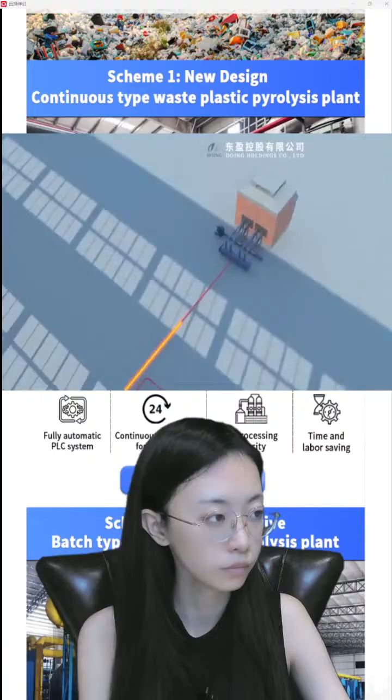We're the manufacturer of tire and plastic pyrolysis equipment.

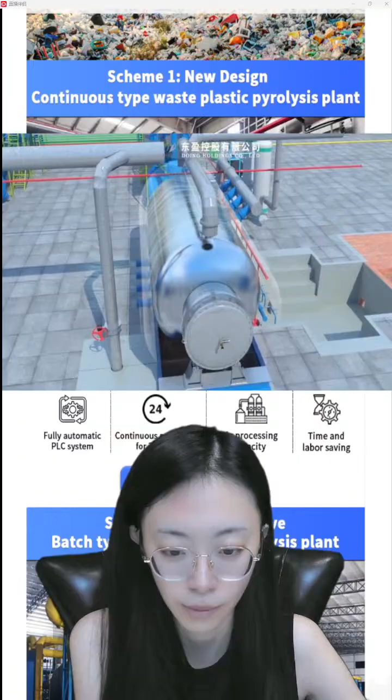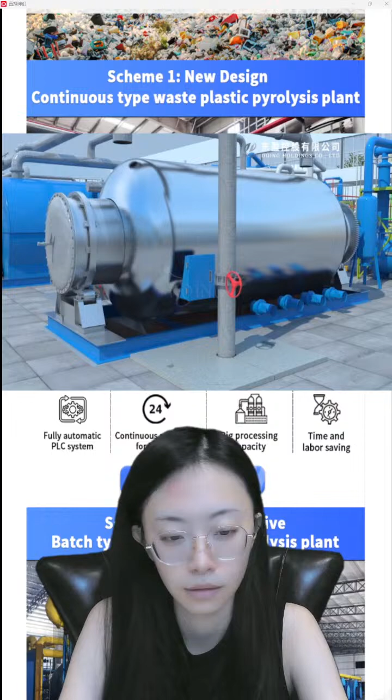We have the batch tire pyrolysis plant, semi-continuous and fully continuous pyrolysis plant.

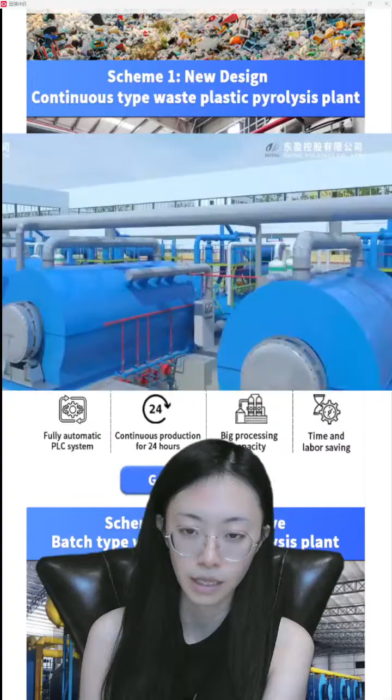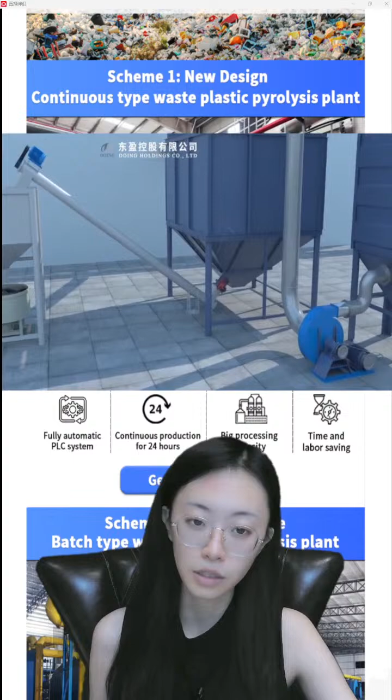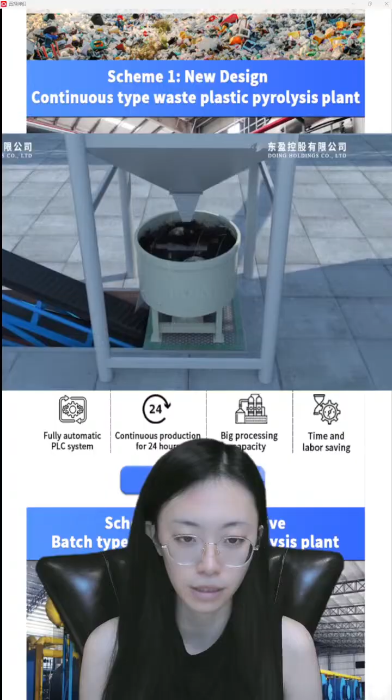Today our topic is: is it possible to recycle cable sheath by using the pyrolysis plant? Well, the answer is yes, and actually this processing way is almost the same as with tire and plastic.

We use the feeding system to feed them into the pyrolysis reactor, and as the temperature rises, the materials break down into hydrocarbon vapors, and then these vapors pass through the condensation system and are cooled into liquid fuel oil. There will also be some solid residue, that is the carbon black, which can be further processed or sold directly.

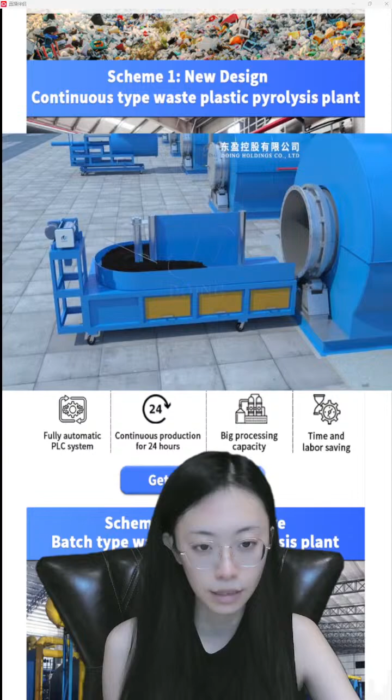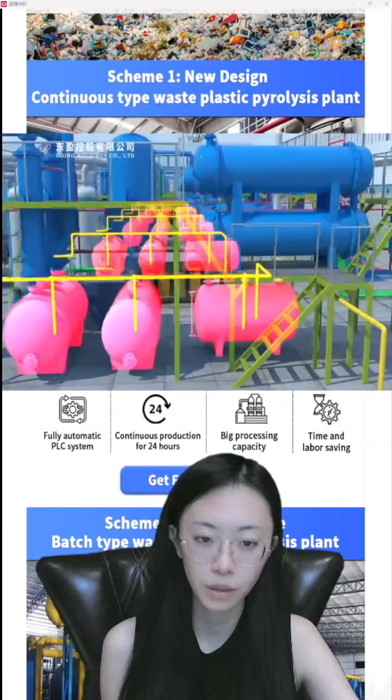And the uncondensable gas, this kind of tail gas, we will recycle by using the purification system, making the system more energy efficient.

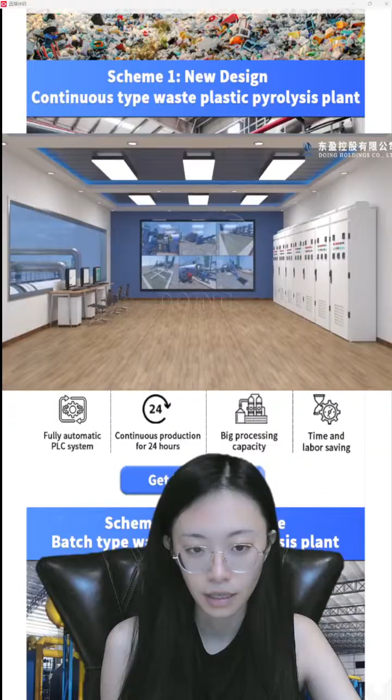But you need to pay attention, some cable sheath is made of PVC. PVC is not suitable for pyrolysis because it contains a high percentage of chlorine, and when it's heated, it produces harmful gas which is highly corrosive and harmful for the human body. So it not only damages the pyrolysis equipment furnace, but also creates a serious environmental and safety risk.

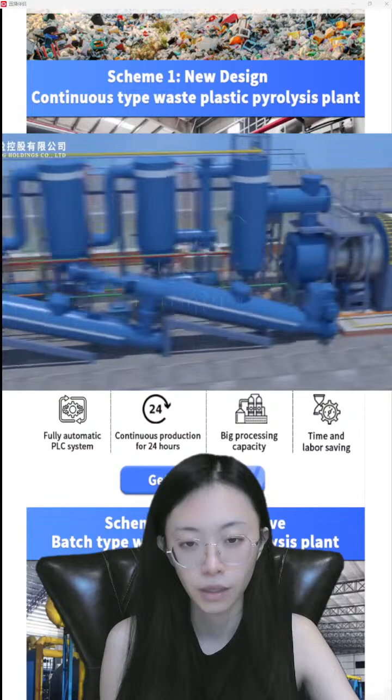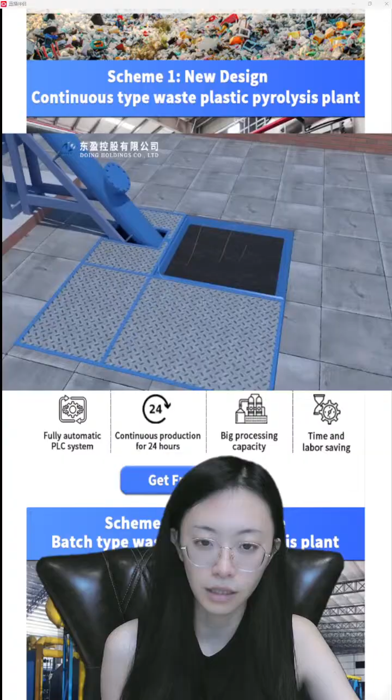So it's not suitable to recycle PVC, and PET is also not suitable as raw material for the pyrolysis plant. PET is commonly found in bottles. It's also not suitable for pyrolysis.

Its structure doesn't break down into useful oil fractions under standard pyrolysis conditions, so we can't get the oil. Instead it tends to form solid residues and produce low value gas, so it may cause a very serious problem: blockage, paraffin inside the condensation system, and pressure problems. That is why PVC and PET are rarely used in the pyrolysis system.

So if your raw material is cable sheath made of PVC, I would suggest you use other ways to recycle. But if it's PE, PP or PS, then we can recycle them. Compared with traditional landfill or burning, pyrolysis is cleaner, recovers valuable resources and reduces environmental harm.

Our equipment can not only process this kind of cable sheath, this kind of plastic, but also PP, PE, PS, ABS, PC and so on. And we can also process rubber. For example, one of the important rubbers is the waste tire.

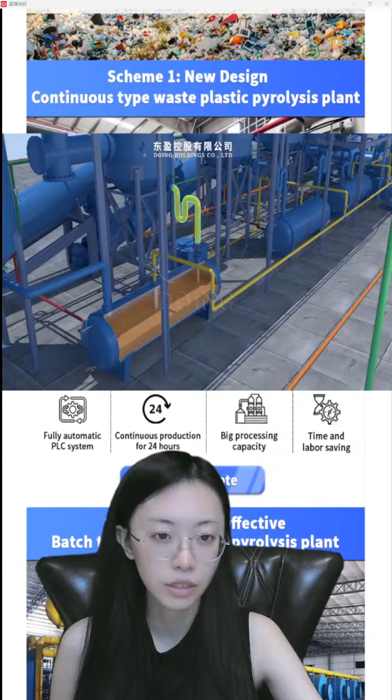Okay, and this is the fully continuous pyrolysis plant. Let's start from the very beginning. We will introduce the different parts one by one and talk about each step.

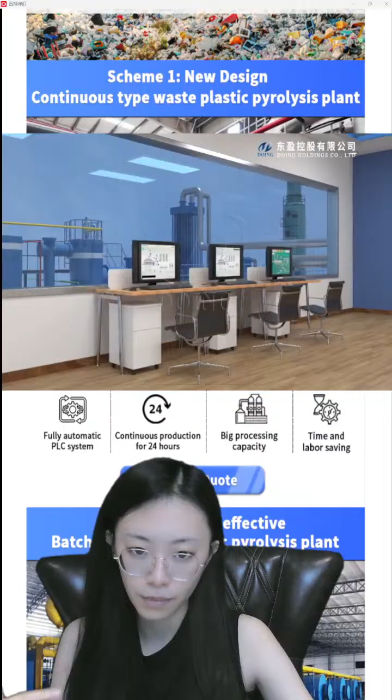This fully continuous plant can work continuously for 45 to 60 days, and this is the PLC system that automatically runs the whole processing line, including the feeding system, the pyrolysis system, condensation system, slagging, and purification system. This is the purification step; all the equipment is environmentally friendly with no pollution, so you don't need to worry about this.

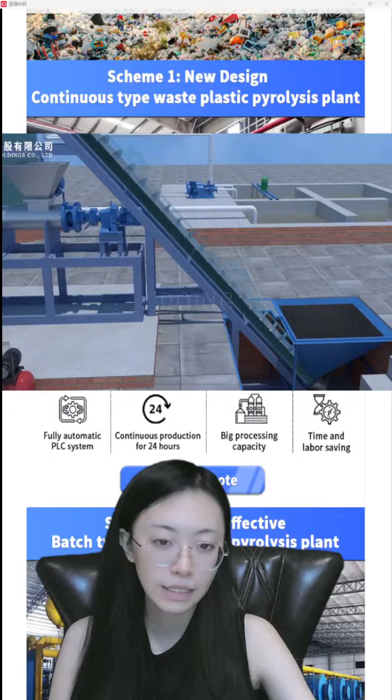And then this is the feeding system. We need to process the raw material. For example, if your raw material is tire, we need to crush it to rubber powder. And if your raw material is cable sheath or other plastic, we need to use the plastic crushing device to crush it into plastic particles.

We use rubber powder with a diameter of less than 1 to 2 millimeters, conveyed to the horizontal feeding auger by the lifting screw conveyor, and then it is conveyed to our reactor for heating.

The furnace of the reactor adopts an indirect heating design with flame heating air, and the air will hit the equipment, which can not only protect the inner body of the reactor and prolong the service life of the equipment, but also make the heat more even by using the indirect way. For the batch type and semi-continuous, we use the direct way.

We change the traditional burner to the tail gas burner, which has advantages of more uniform heating and is more efficient and more convenient. And this is the middle supporting wheel for our reactor parts. There is a cooling circulating water device to cool the lubricating oil and thus protect the supporting wheel.

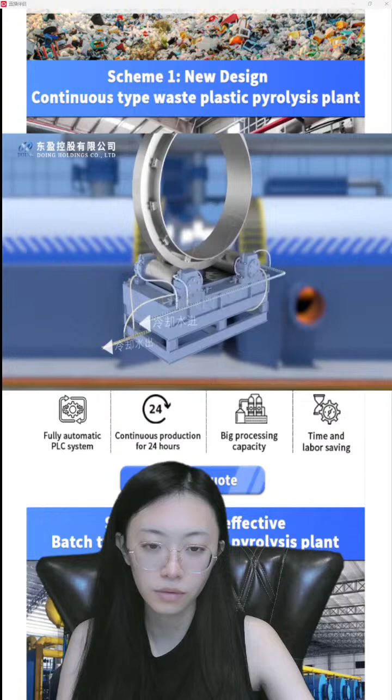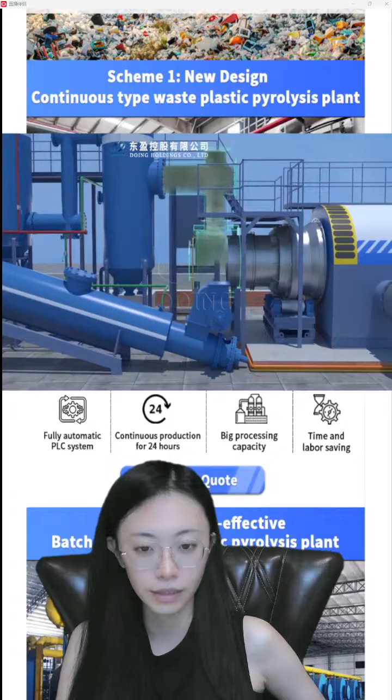And then we can get the gas and the carbon black from the outlet of the reactor. The green part is the fixed section, which is connected with the buffer tank upwards and the slagging system downwards. And this is a buffer tank, which is used to slow down the gas and to precipitate impurities. And next we come to the buffer condensation tank.

We have 3 tanks to further precipitate impurities and have the water cover outside. Outside is the way to have the condensation effect. And after condensation, the oil will roll in the U-tube and go into the storage tank. The U-tube is used to balance the pressure and prevent the oil gas from going back to the previous step.

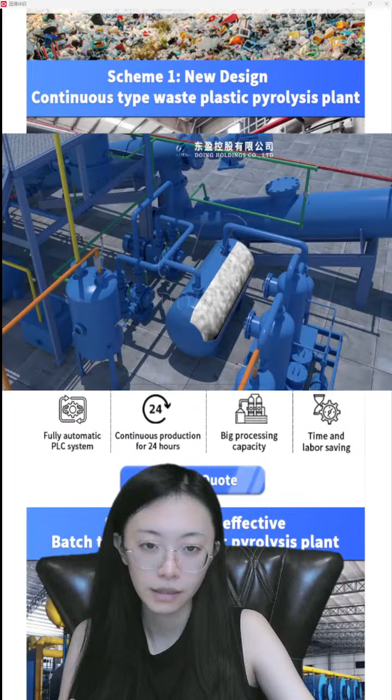And these are the 3 vertical condensers used to increase the cooling area and ensure all the gas is condensed to oil. And this is the negative pressure device, to pump the gas, and it can reduce the time that the carbon black contacts with the gas, to have a good quality of the carbon black.

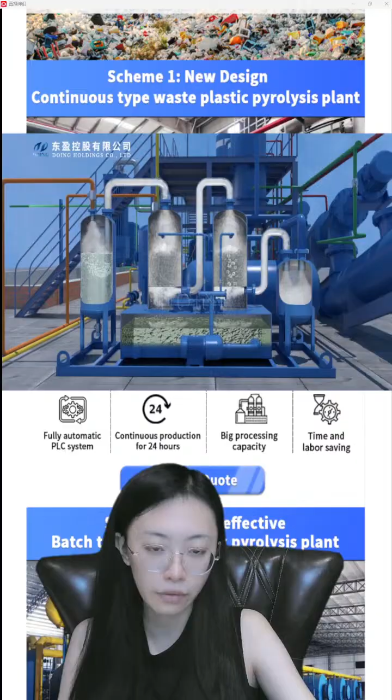And this is the gas that cannot be condensed. We call it tail gas. We use this odor removal system to purify the hydrogen sulfide inside, and then the tail gas can come back to the reactor for heating. For the fully continuous pyrolysis plant, we only need the first 8 hours to use extra heating energy, like natural gas, coal, tar, or fuel oil. And in the next few days, we can all use the tail gas. There is no extra heating energy and extra heating consumption.

And then this is the slagging system. In the first section, it has the heat preservation system, and we specially designed a material seal design to prevent the gas release. And by using 3 stages of the condensation slagging system with a water cooling, it can be packed directly.

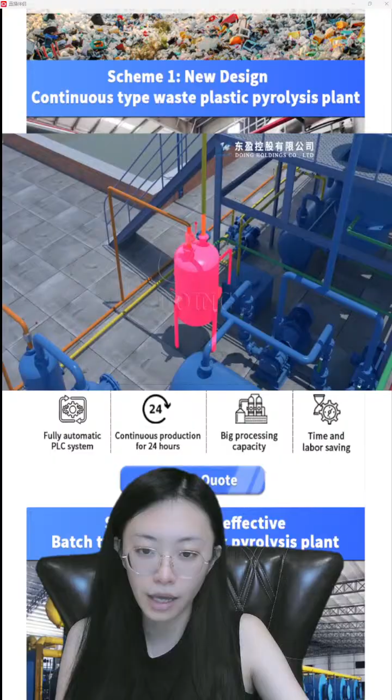Here are some safety devices. The buffer tank is connected with a pressure relief valve. If the pressure is too high, the valve automatically opens to release excess oil gas, and then the gas will release into the standby water seal and cool down into oil. Here is the standby stove.

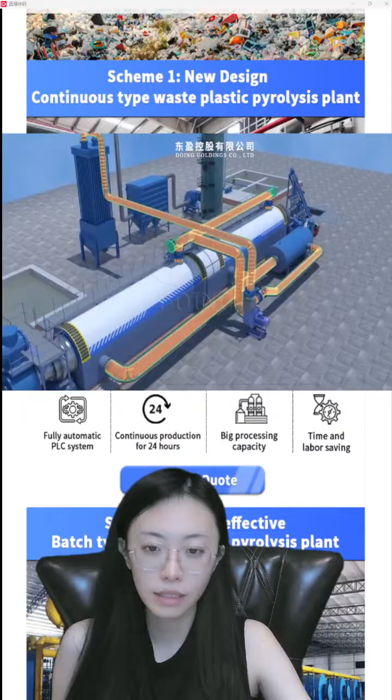And then this is the purification system. There are 3 devices for the flue gas treatment system. The first one is the air cooling step, to cool down the temperature of the gas. And then the second is the dust collector, which is used to remove the dust from the flue gas, and the desulfurization tower.

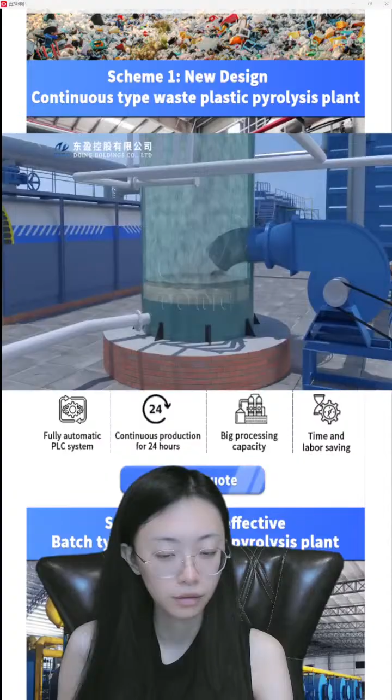Too loud voice. Sorry, wait a minute, I'll check it.

And then this is to purify the gas by using the purification system, and then there is no pollution during the production. And then this is the automatic pumping system to collect the oil into this final tank.

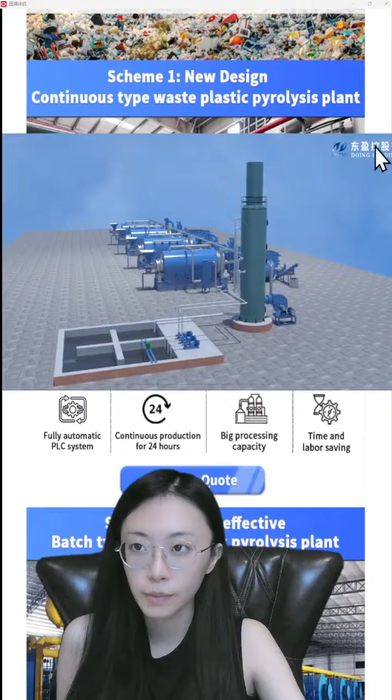Okay, this is the fully continuous pyrolysis plant, and let's talk about this. This is the... hello. And this is the fully continuous one.

The capacity of the fully continuous is 15 tons per day, 20 tons, 30 tons, and 50 tons per day. Most of our customers choose the 50 tons per day, because the customers who choose the fully continuous one have a large capacity, need to process plenty of raw material every day, and have a high standard of working efficiency. So that is why most customers choose the high capacity continuous one. And the first advantage of the pyrolysis plant is that it's fully automatic.

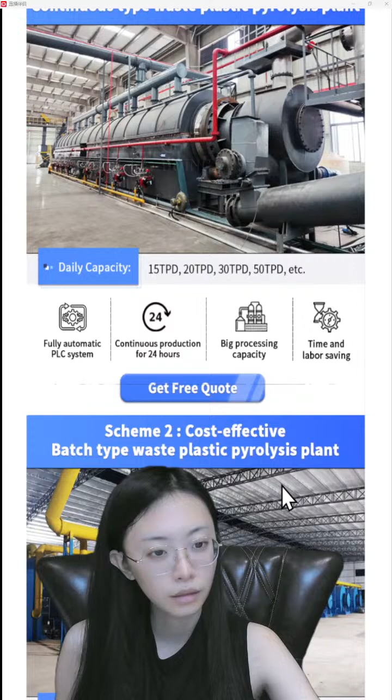Fully automatic, and we can process with the PLC system. And then the second one is the continuous production for 24 hours. We can use them and work for 45 to 60 days. That don't need to stop the production.

Like the batch type one, we need to stop them and cool down the reactor for slagging the carbon black, but it's not very necessary for this fully continuous one. They can feed the raw material, have the pyrolysis reaction and slag the carbon black at the very same time. So this is why it's called fully continuous.

And the time and labor saving: for a 50 ton processing step, we only need about 1 or 2 workers. What's the price of the semi-continuous one in USD of 15 ton per day?

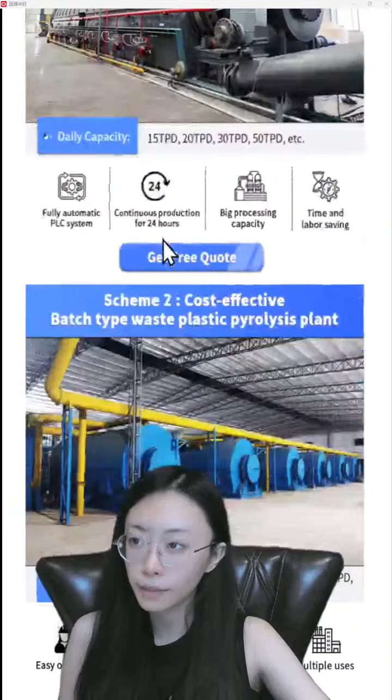Okay, and if you're interested in the semi-continuous pyrolysis plant, let's see about it. This is not shown in this picture. Let's see the 3D video. The semi-continuous one also doesn't need to cool down the reactor to slag the carbon black. It can slag the carbon black at a very high temperature, so it can save like 5 to 10 hours, and it can feed the raw material at the same time to have the pyrolysis reaction. Also, it has a higher working efficiency.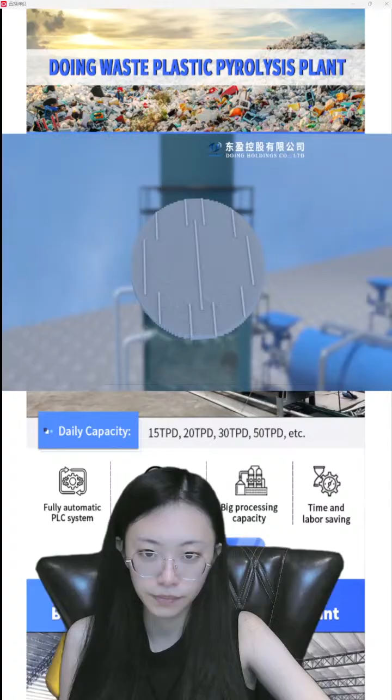And about the purification system, we have the water film dust system and the desulfurization tower. There are different ways to purify, so the process is kind of different. And this is the desulfurization tower that has 3 layers of spraying and 3 layers of precipitation. And this is a demist system to lower the moisture of the gas.

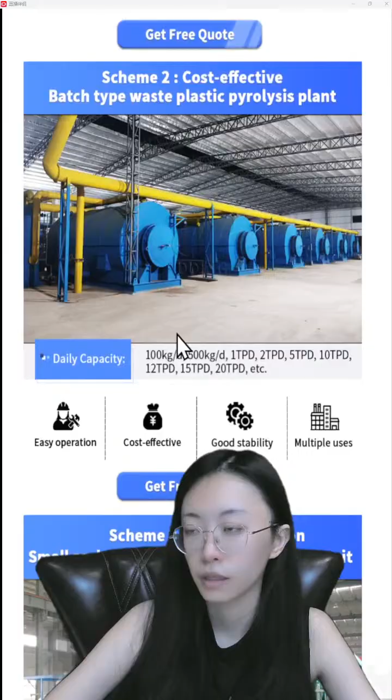Okay, this is the batch type pyrolysis plant. Let's see about this picture first. Here it is a batch type pyrolysis plant. That's the daily capacity - we have small ones that are 100 kilogram, 500 kilogram or 1 ton, 2 ton.

This type is for tire processing, because if you have a large need for oil business, it's more suitable for this several processing line, and it's easy operation, and it's the cheapest of the 3 types, because the technique is the most common one, and it's more easy to control - doesn't need a PLC system, it's not very automatic. Just compare with fully continuous or semi-continuous: cost effective, good stability, multiple use.

So the biggest advantage of the batch type one is the multiple use. We don't need to process the waste tire into black powder, rubber powder, and for the plastic, we also don't need to process them. We can put it directly into the reactor.

For many other raw materials like oil sludge, coal tar oil sludge, aluminium, plastic, cable sheets - some of them may have big blocks, so they're not very suitable for the continuous type, because they need to be slagged by the slagging wrench. If you have large ingots, like aluminium ingots, they will block the screw conveyor. So all the raw materials that can be processed using the pyrolysis technique can choose the batch type one. That's why it's multiple use and also very popular in this market.

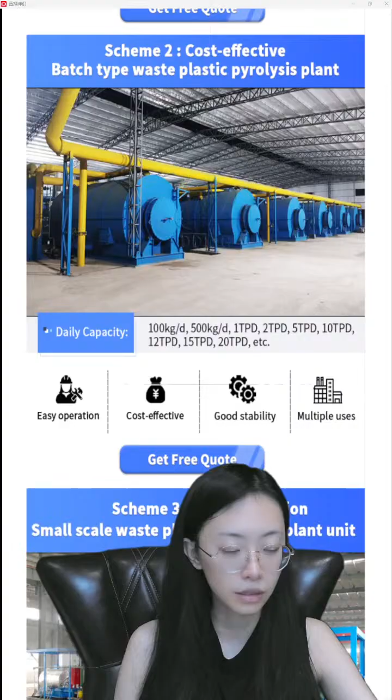And let's see about the 3D video of the batch type pyrolysis plant.

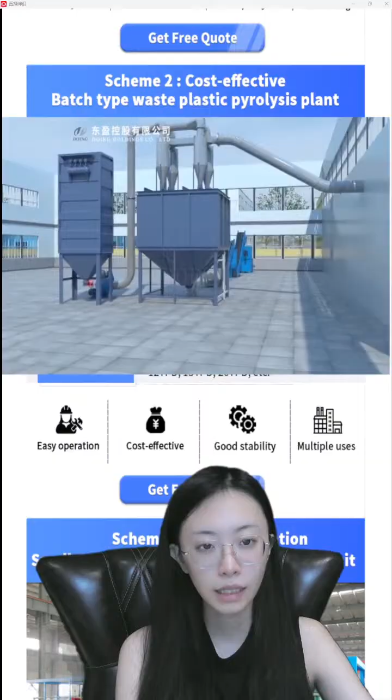Here is the processing line of the batch type pyrolysis plant. It has 6 lines. One processing line just occupies nearly 300 square meters. With 6 lines, the daily processing capacity is nearly 70 tons.

First is the feeding system. We need 2 workers for this. Here is the automatic feeder, with a hydraulic thrust of 50 tons. It will take nearly 2 hours to feed the raw material, the whole tire, into the reactor. After feeding, we will close the feeding door and open the combustion system to heat.

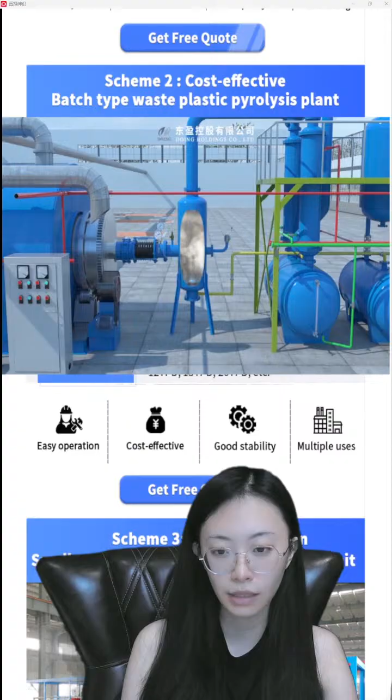After heating for nearly 2 hours, the temperature will gradually rise and gas will be generated. The gas is a mixed oil gas and tail gas. The gas will come out at the outlet, and then first come into the buffer tank, which can slow down the gas, make it stay in the cooling system longer, and ensure sufficient cooling in this step. It can also deposit the impurities.

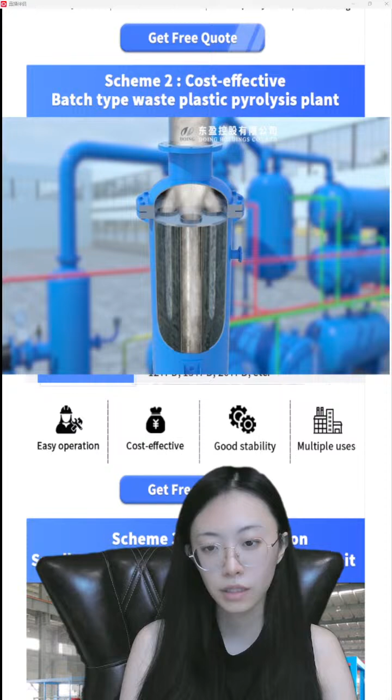Then they will come to the cooling system. This is the tube condensers, different from water tank condensers. The first is the vertical condenser, because the first-cooling oil is relatively higher and sticky. By using the vertical design, the oil continuously flows to scour the inner wall to prevent blockage. Then they condense into this 2-ton oil storage tank.

And then they come to the second step, we call it the oil-water separator. It is a condensation system, a safety device and a purification device. It can prevent the oil gas from flowing back to the previous device, and then purify the gas.

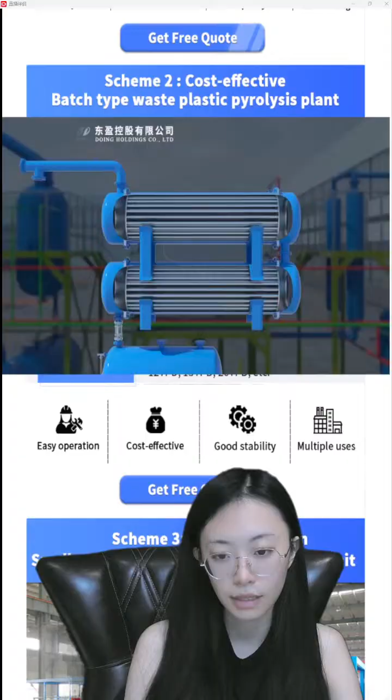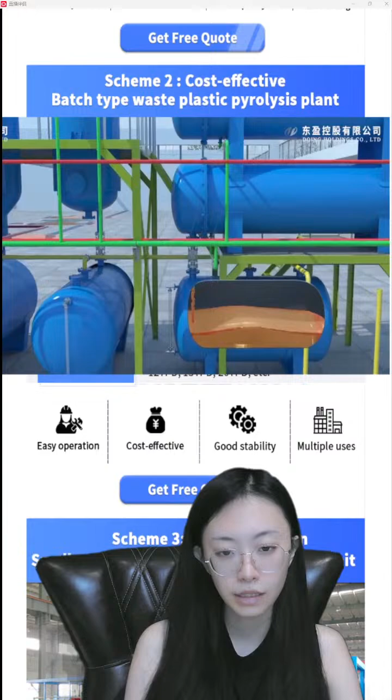Then we come to the third step, the horizontal condensers. These have the highest condensation efficiency and the largest condensation area, and can condense most of the oil in this step.

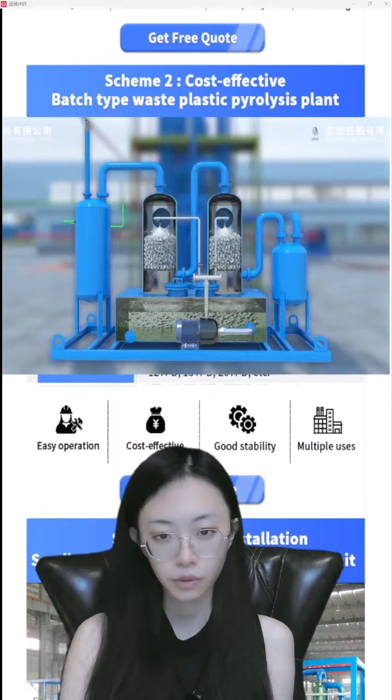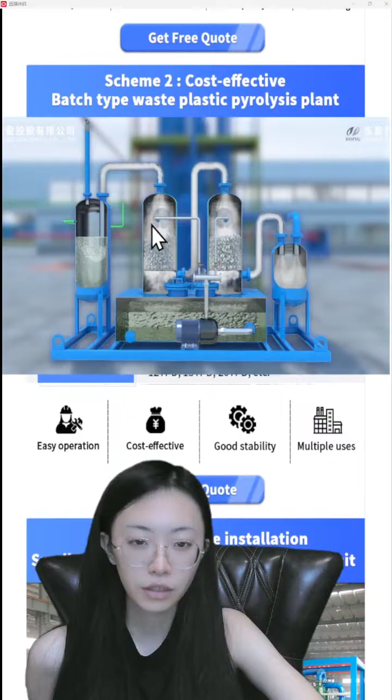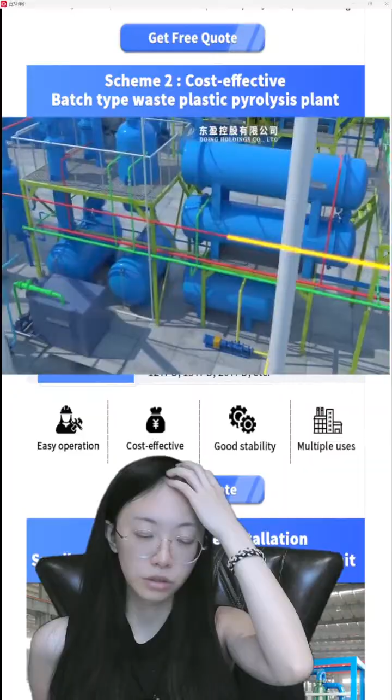And the last cooling tower, which ensures all the gas will be cooled down. Then this is the tail gas, which cannot be condensed. We use the tail gas purification system, or removal system, to purify them, to remove the hydrogen sulfide using sodium hydroxide solution inside. This is the physical filter inside, used to disperse the gas. The purified tail gas is recycled to the reactor through the pipeline to heat it.

This is done using the tail gas burner - we have 4 tail gas burners. And this is the environmental protection device we have selected to remove sulfur dioxide and dust.

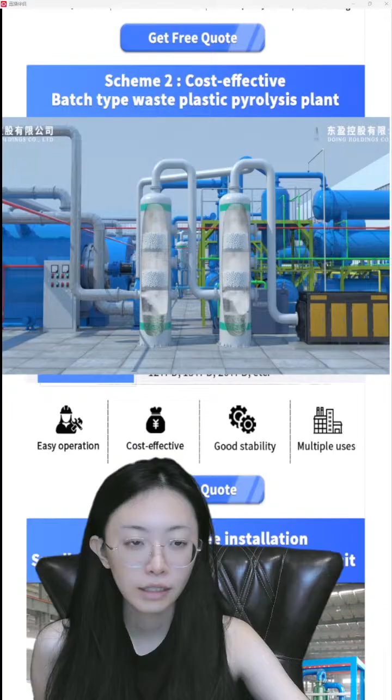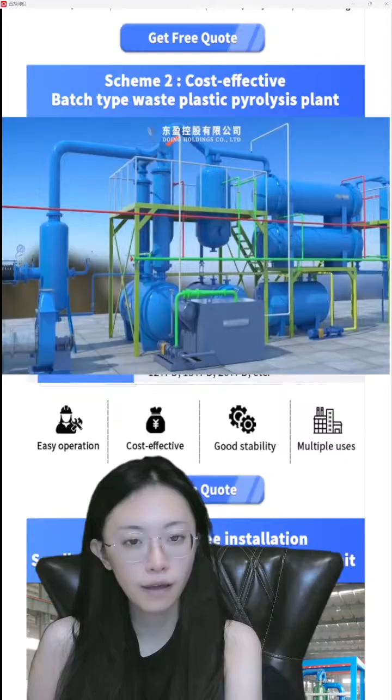And this is a vacuum device. It takes about half an hour to an hour to pump out the residual oil gas in the reactor, and then it's pumped into the horizontal condenser here, where the gas will condense into oil. When we open the slagging door to remove the carbon black, there is no oil inside the reactor, so there is no possibility of a flash explosion.

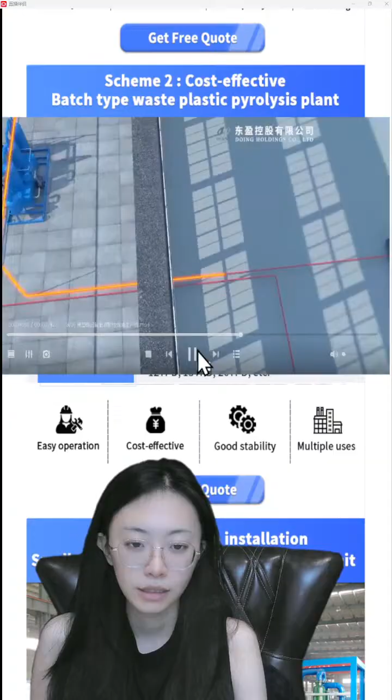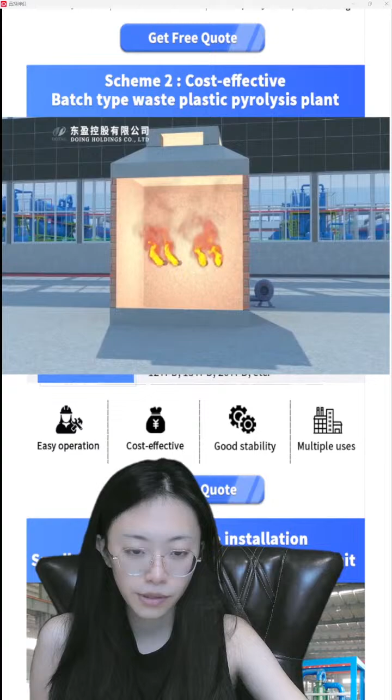And then the residual oil gas, using this burning chamber, we burn them directly. Because the amount of tail gas is very small, it's not very necessary to store it. We only store it if there's a safety concern, but otherwise it's not necessary. Here is the air cooling system.

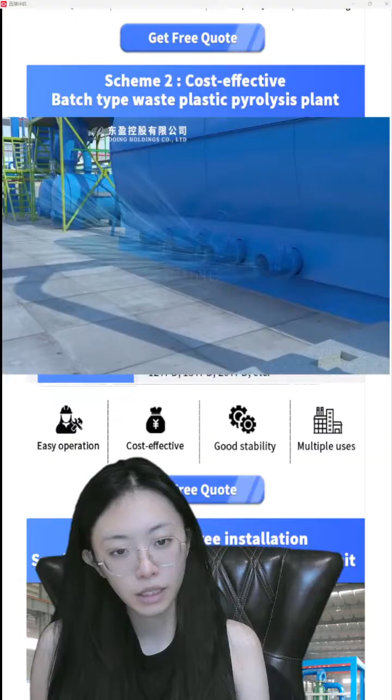We equip it with a 15 kilowatt draft fan that can shorten the cooling time by half, greatly improving operation efficiency.

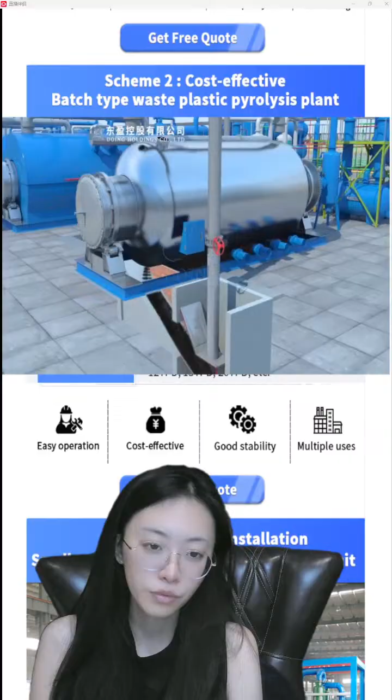After cooling, we come to the side discharging system. It has two advantages: with the two stack discharging ports, the reactor can discharge carbon black twice in one revolution, greatly improving efficiency. The carbon black discharges directly underground to prevent it from flying and polluting the workshop.

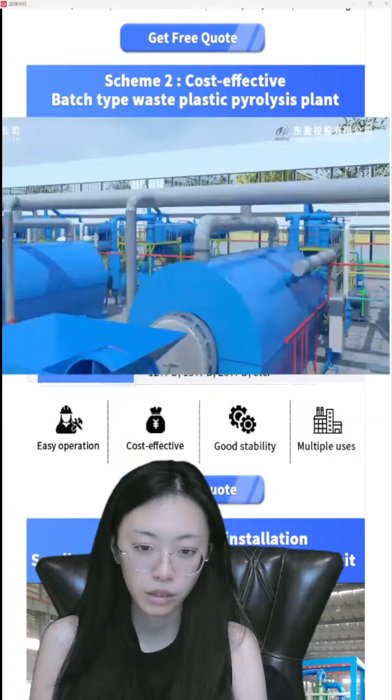Then we come to the carbon black transportation system. We use a wind conveyor to put it into the deep processing step, the carbon black briquetting system.

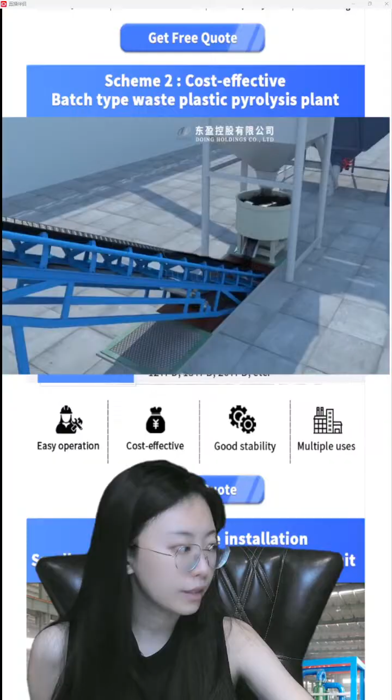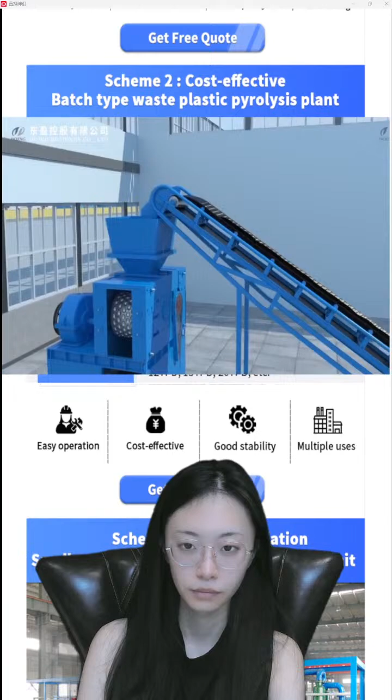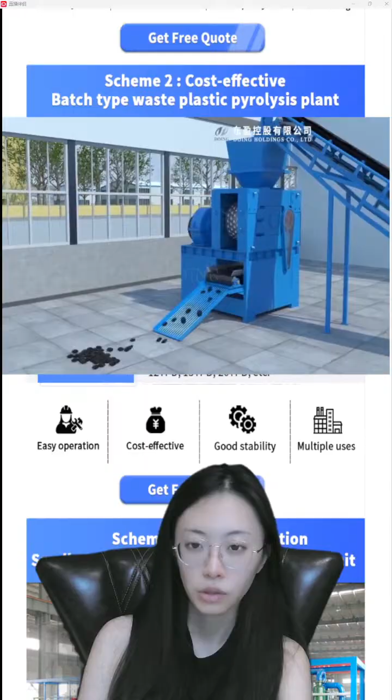And this is the briquetting. The carbon black can be burned directly to replace coal, or used as raw material for rubber, plastic, or tires.

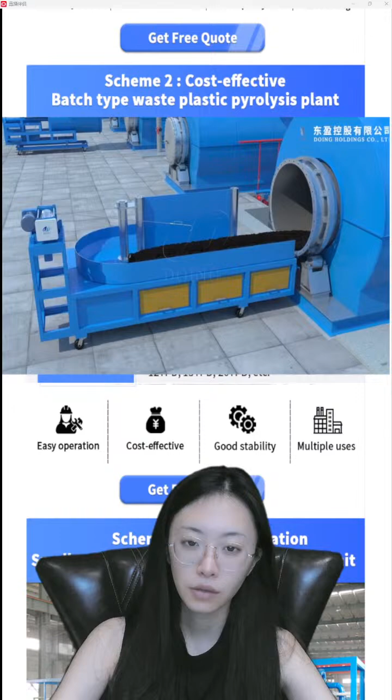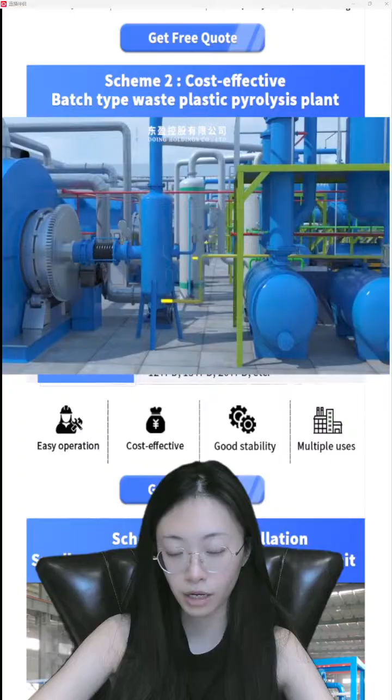This is the last step, pulling out the steel wire inside the reactor. From waste tires, we can get nearly 15% steel wire. The oil yield from the tire is almost 40 to 55%, and we also get 30 to 35% carbon black.

And this is pumping the oil into the storage tank, into the final storage tank.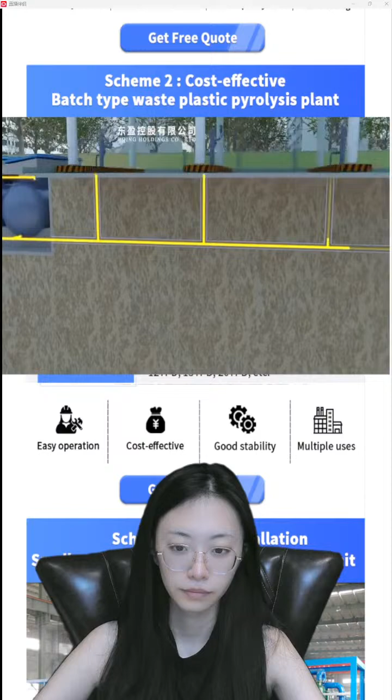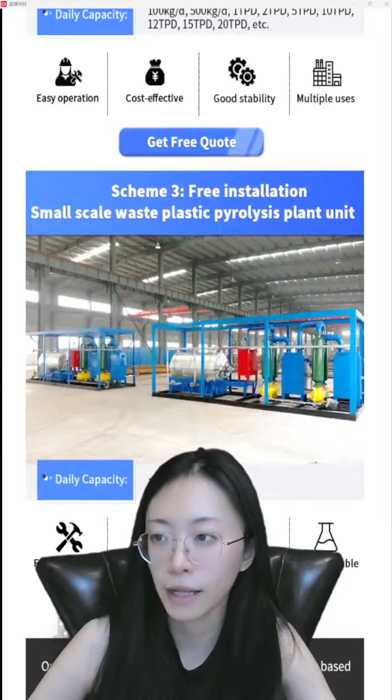Here is the 3D video of the batch type pyrolysis plant, and we also have a small scale frame type plastic pyrolysis plant. It can also process cable sheets. This is for 100 kilogram and 500 kilogram per day capacities.

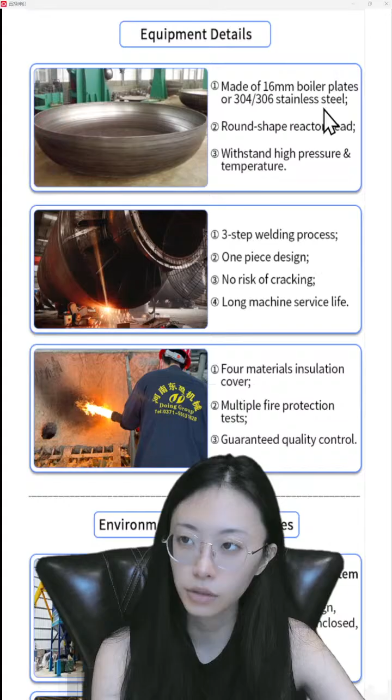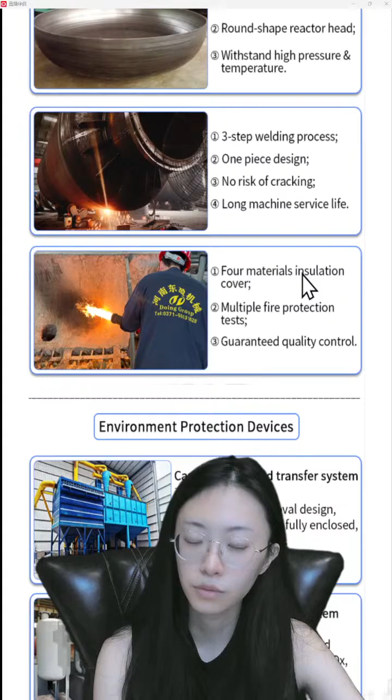Here is the detailed design. We use a round shape reactor head, and the material is like boiler plates or stainless steel. We have a pattern design for the welding, and for insulation we use either 3-layer or 6-layer designs for different types.

There are also different safety purification devices to purify the dust, the tail gas, and the smoke gas.

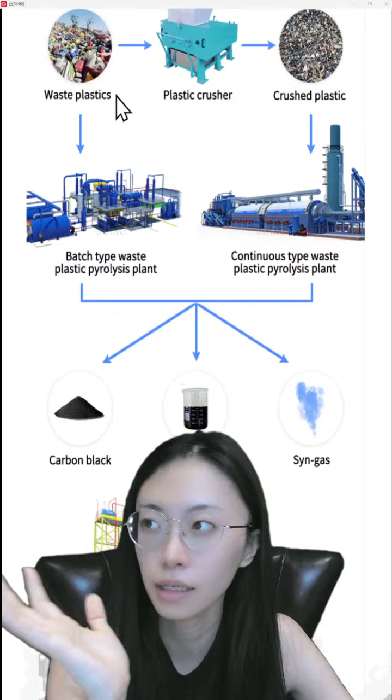Okay, this is today's information. For plastic, we can use the batch type, or crush it and use a continuous one, to get carbon black, fuel oil, and gas. We can also purify them into diesel.

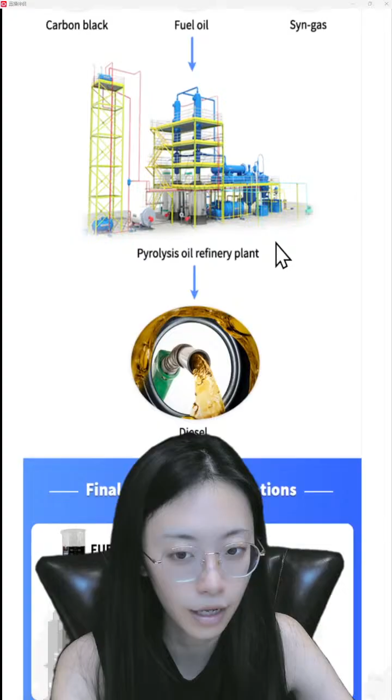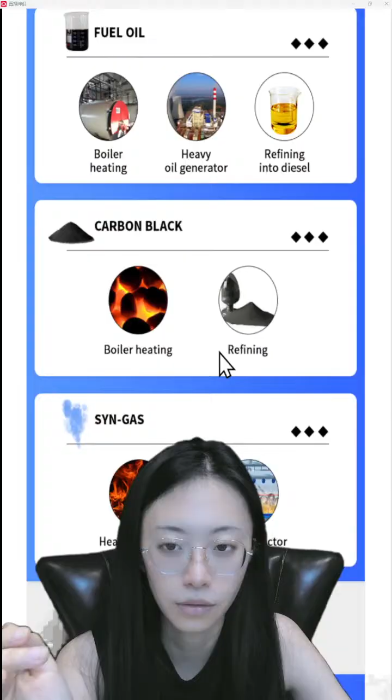This is the desulfurization system to refine them. Then we can use the diesel in agricultural machines, mining machines, or heavy oil generators, and so on.

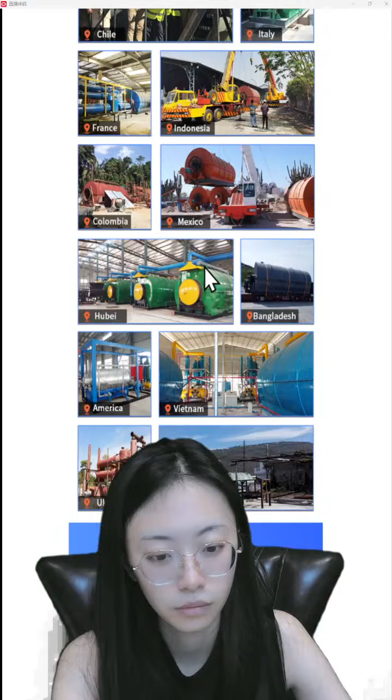This is our project cases all over the world. We have project cases in around 120 countries, and also customers in China, in each province. So you can come to China to see our factory and project cases, or visit project cases near your region. You can contact our sales manager for this.